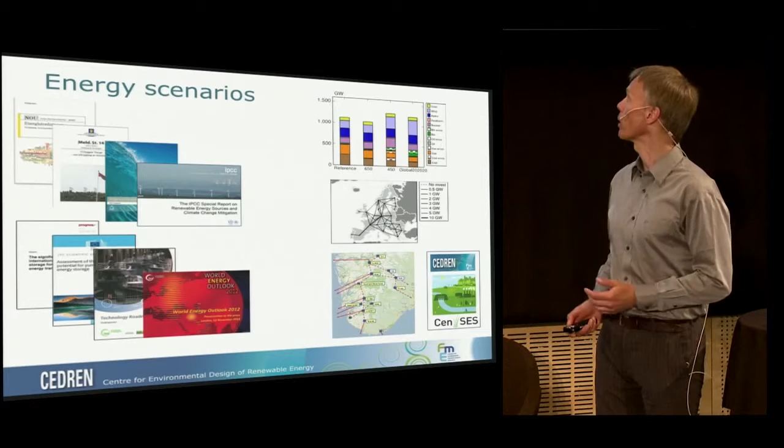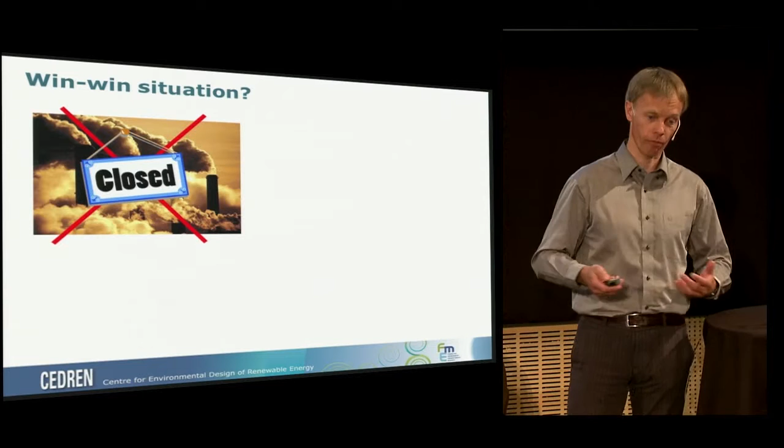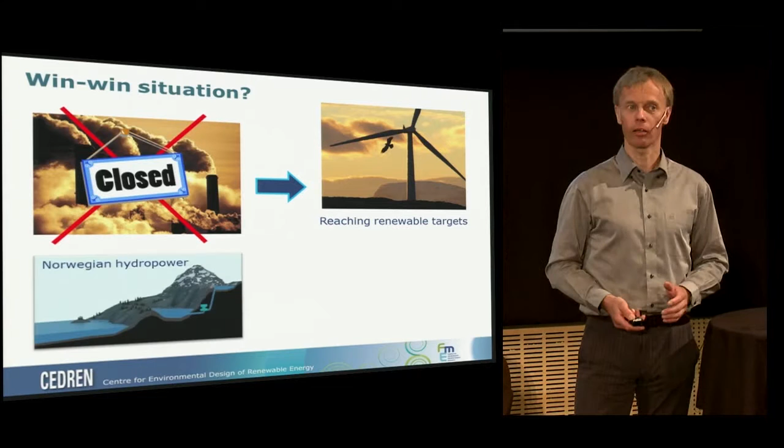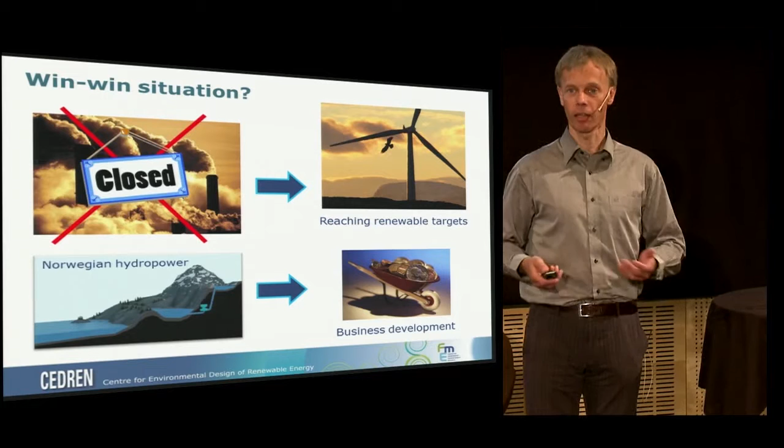First of all, the background for this is, of course, we are looking for some kind of a win-win situation. We have all these fossil fuels, which sooner or later have to be closed down for giving us power, and we have to have a transition to renewables. We all know this, and it will happen in time. My question is, how can Norwegian hydropower contribute to this? At the same time, as we heard today as well, we need to have growth, economic development, and business development. So this needs to be done.

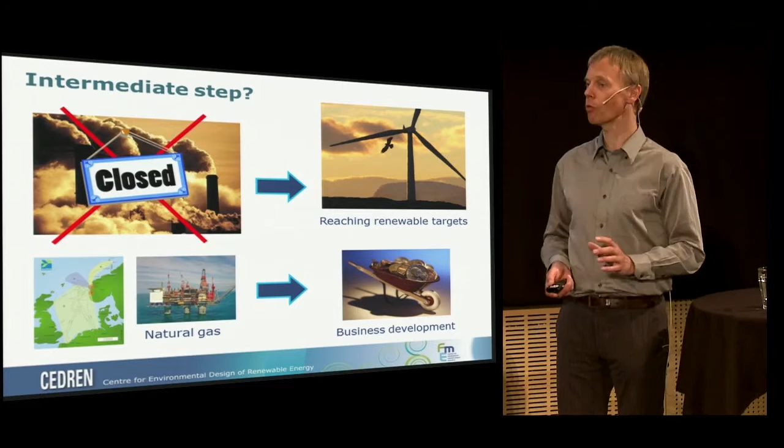As you have just heard, we have reached 400 ppm of CO2 in the atmosphere. And everybody agrees that we need to do something to get rid of our oil dependence, of our dependence on fossil fuels, and turn to alternative energy. But how to do that? To build that bridge, we hope that knowledge can be a part of that. And that's what we are in the research business to help out. And that's what you, as the future of this planet, will have to deal with. You will have to help build that bridge.

Going back to these energy scenarios again, they have one thing in common. They all point out that there will be a large portion of renewables, and to facilitate the use of them, to give everybody access to clean energy, we need to have better infrastructure, more storage, we have to manage this, and we have to be better at forecasting what's going to happen, because many of these renewables will be related to the weather.

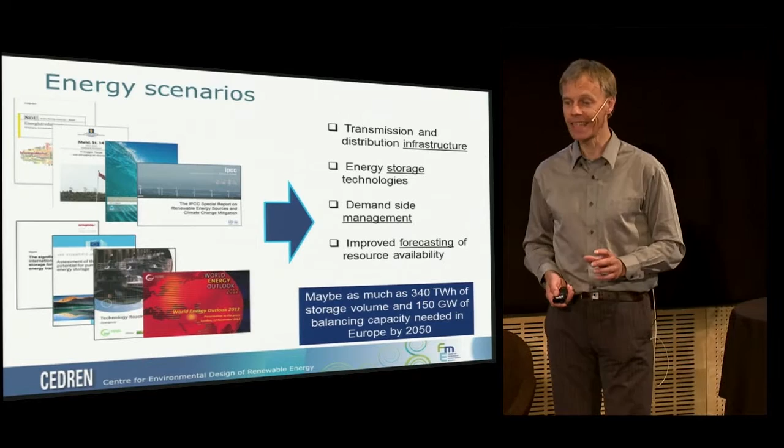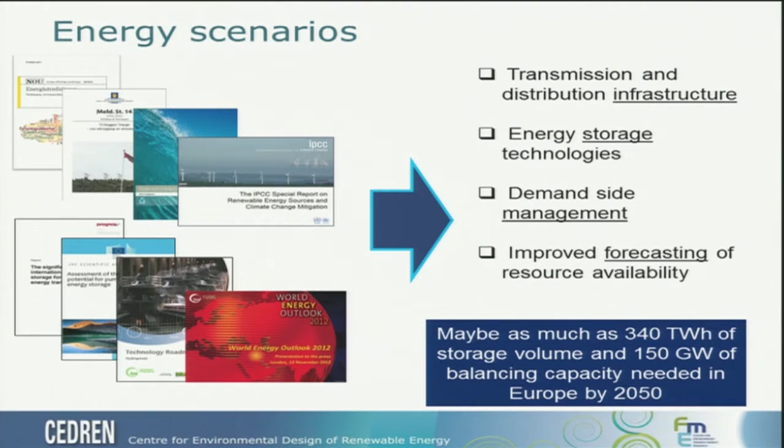Talking about storage, which I will focus on now, there have been studies suggesting that we will have a need only in Europe for maybe almost 3 times as much energy available for storage as we need in Norway alone today. And this is only for storage and balancing with these renewables that are coming in with a large capacity. Never mind the figures, they are probably not correct, but there have been guesses about the future that suggest such figures. Large amounts of storage and balancing are needed in the future.

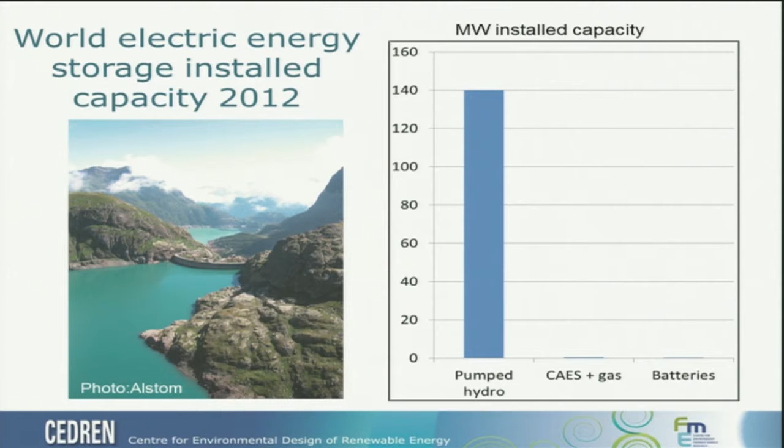How do we store electricity today? Well, we store it as pumped hydro, like the picture here shows you, from a place in Switzerland, reservoirs of water. This is the ideal storage of energy. If you raise that to a head, you will have energy stored. Other technologies are not really providing anything. There are batteries, compressed air, and so on, but compared to pumped hydro, they are not contributing.

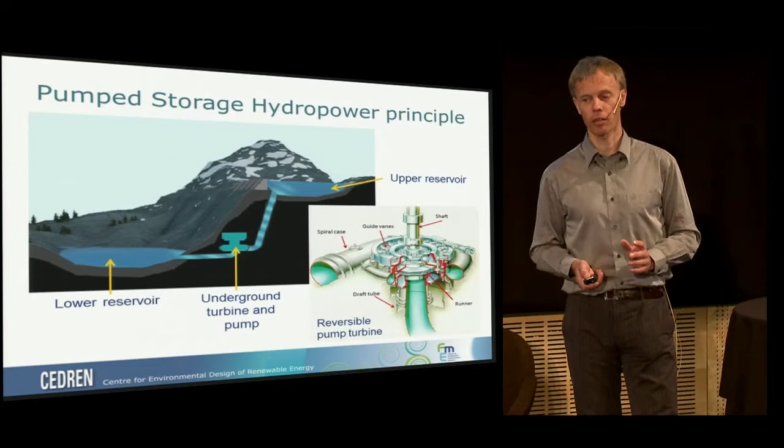To give you an idea, if you don't know how pumped hydro works, you can imagine 2 reservoirs of water, an upper reservoir and a lower reservoir, connected through a tunnel and with an underground pump and turbine, which looks something like this. This is how pumped storage is contributing today to balance the difference between demand and production of energy.

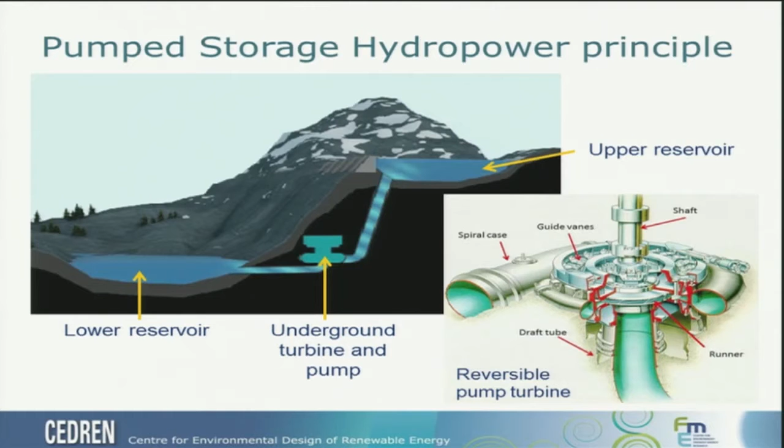Today, I said briefly 140 gigawatts, while Norway's total hydropower installation for normal hydropower today is 30 gigawatts. So 140 is not really a big number compared to what little Norway is already producing. And Europe has about 45. Compared to the big figure I showed you recently, this is not enormous.

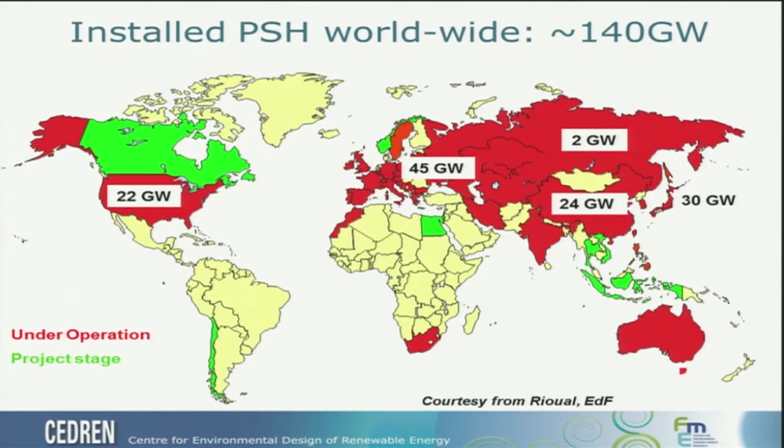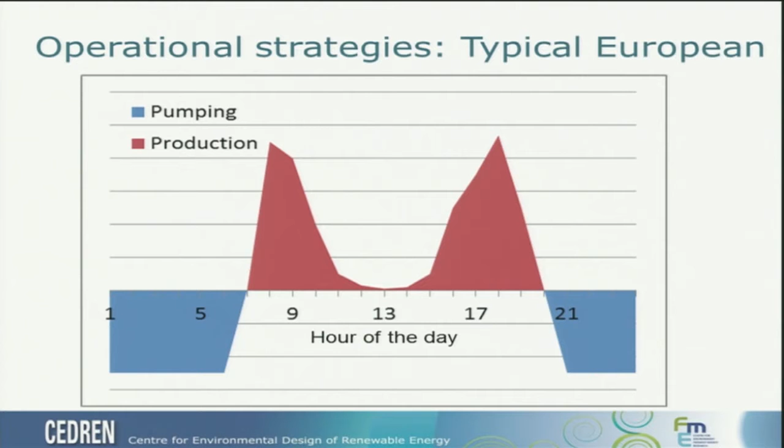The way it's used normally is like this. During nighttime, water is pumped to the upper reservoir, and during daytime you will produce and run it through the turbines to the lower reservoir. This picture is taken from Germany. You can ask why does it have such a peak in the morning? Well, basically because everybody turns on the shower and wants their coffee, and the same thing when they get home from work. And in the middle of the day, you might have solar energy providing the services, so you don't need it.

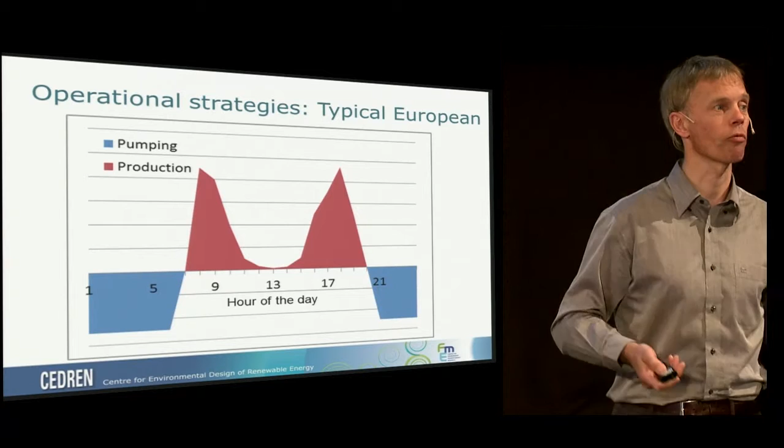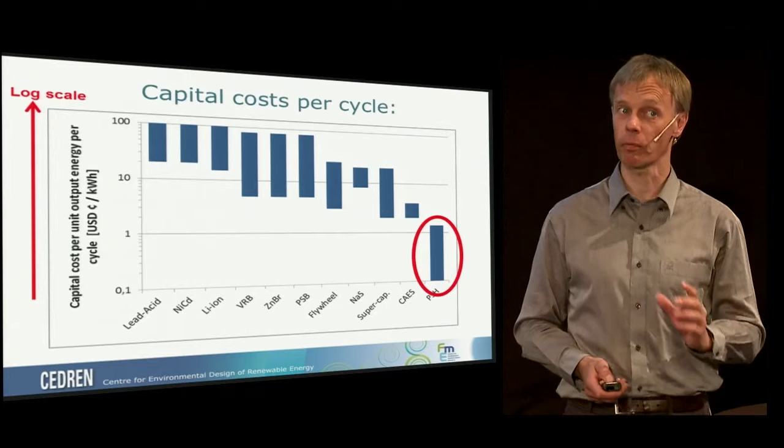Why is pumped storage the only technology used today? The reason is probably found in the cost. Look at this. On the right end, you have pumped storage hydropower. Look also, this is a logarithmic scale, meaning the cost range of pumped hydro compared to all other technologies that exist today. Of course, many of them will get lower cost as research goes on, but hydropower is an order of magnitude cheaper in the way of storing the energy.

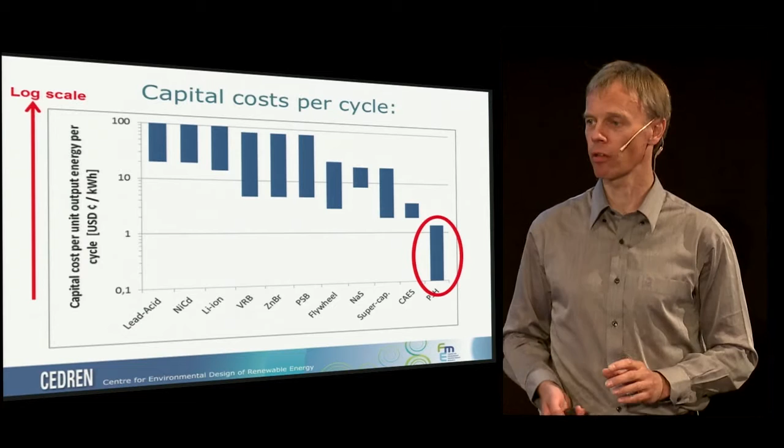There are, of course, many other considerations that must come into place if you want to store your electricity somewhere, but this is one important one: up to today, this has been by far the most efficient and by far the cheapest. So let's have a look at what they look like.

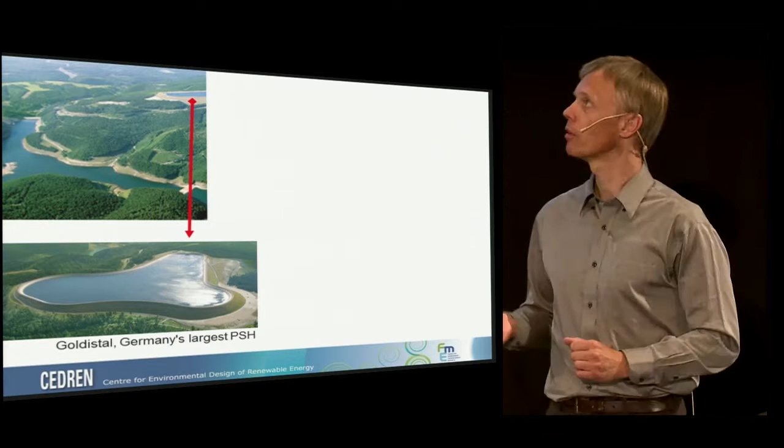Well, this is a picture of Germany's largest pumped storage hydropower station. You see on the upper picture, this is actually a totally artificial lake built on top of a hill to interact with this lower reservoir, and water is put back and forth here.

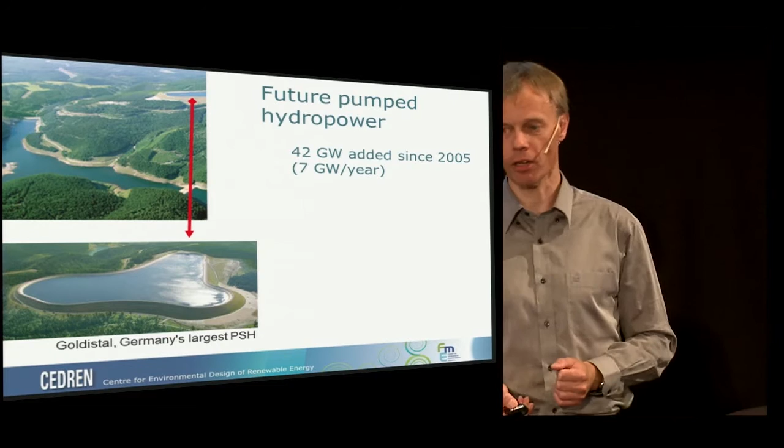There has actually been a lot of pumped storage hydropower added in the last years, and for the future there are huge numbers projected. I'm not sure if they will be 500 to 700 gigawatts worldwide. Remember, today we have 140. In 2050, this is what the IEA suggests, but at least there will be a large need and large numbers of this kind of technology.

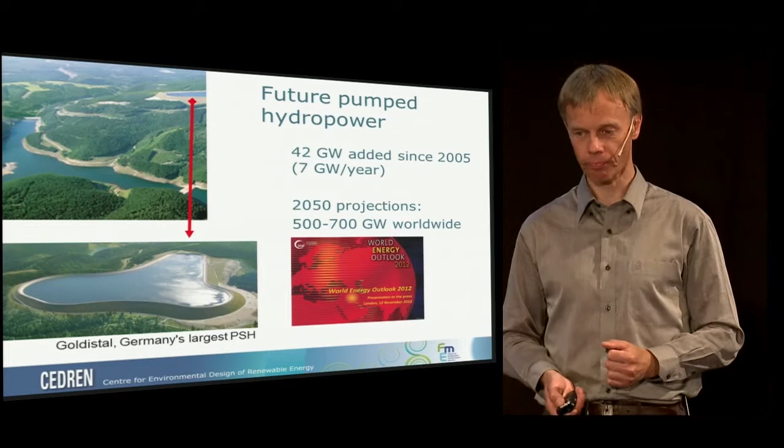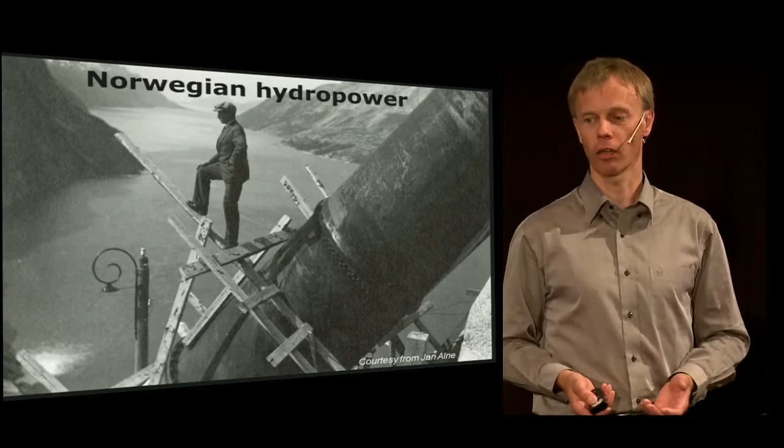Okay, let's have a look at how Norway is doing our hydropower. Norwegian hydropower is the backbone of our welfare. Norway would never have developed such industries and such welfare if we didn't start exploiting hydropower more than 100 years ago on a big industrial scale. Of course, we're not doing it like this anymore. I'm quite sure the health, safety, and environment directors of this power company would not have approved that kind of attitude. But still, this is the backbone of our welfare.

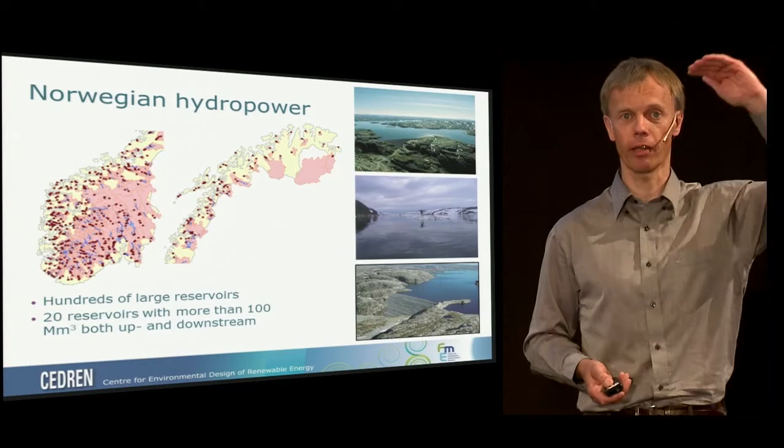And Norwegian hydropower is not at all like hydropower in the rest of Europe. We have hundreds of large reservoirs, and they are mainly made from natural lakes, which we put a dam on to have regulation, right? Of course, there are also some artificial dams, like the one I showed you from Germany, but most are not. And there are even many pairs of reservoirs. Some are in the high mountains, some at intermediate heights, and some at sea level.

One of them, the biggest reservoir we have today, can store almost 8 terawatt hours of energy, which is 5% or more of Norway's need. And it would take 3 years to fill this up if it was empty.

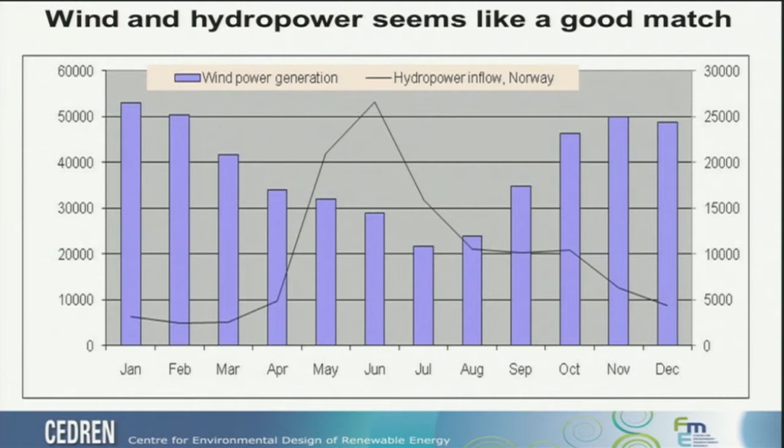Because of snow and cold conditions, the inflow to hydro reservoirs is highest at this time of the year, actually. If you were here in Norway a week ago or a little bit more, there was quite heavy flooding in some places because of heavy snow melt. So it looks like a perfect match on this scale.

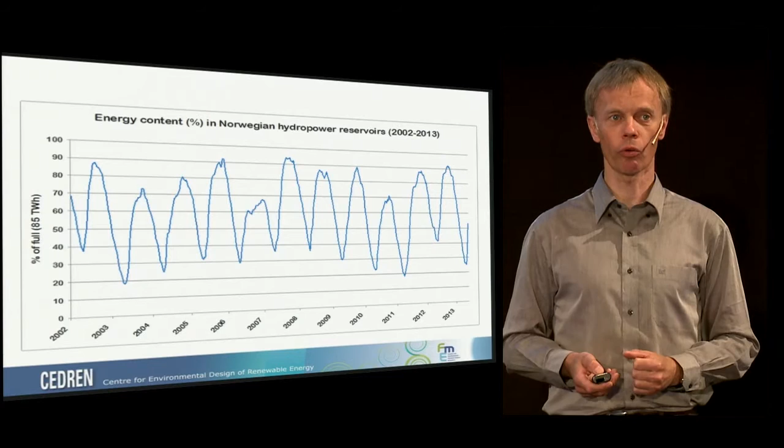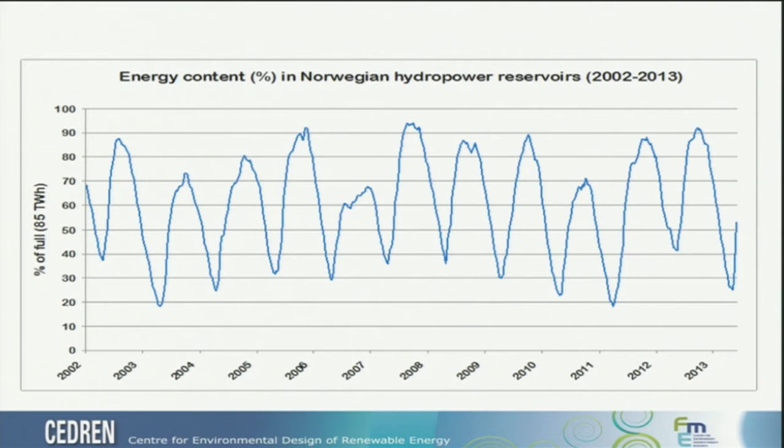And if you look at all the Norwegian reservoirs, this is 10 years of storage level. They are almost never totally full, and they're never totally empty. It cycles throughout the year, of course. So there is storage capacity available.

Let's have a little look at how it works in Norway. We're not doing any pumped hydro in Norway like they do in Europe, but we need indirect storage. If you follow this figure, it's from a week in October. The blue line is power generated in Norway, and the red line is the actual demand. So in the middle of the day, we generate more, and we export it to Denmark, Sweden, and the Netherlands, where we have interconnectors today.

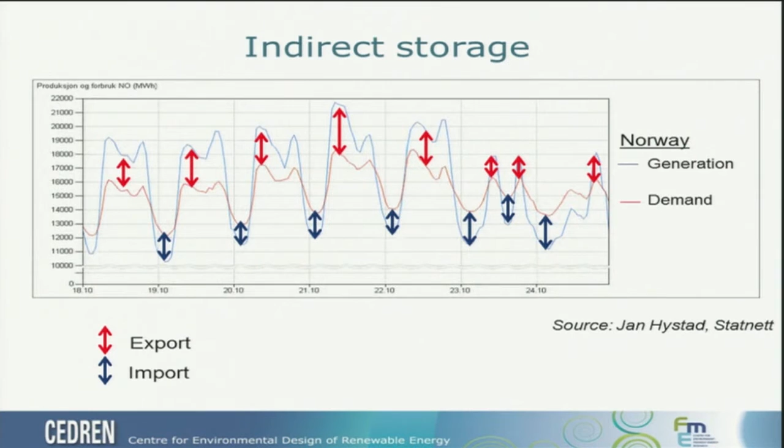And at nighttime, actually, when the demand is lower, we produce less, because hydropower we can turn on and off more or less as we wish. Of course, there are some restrictions, especially in those plants that have an outlet directly into rivers. But this is how we do it today.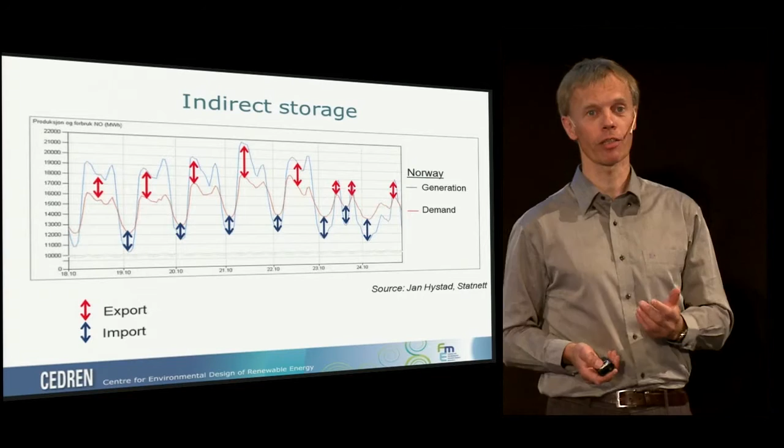We don't actually need to pump the water back, because nature takes care of that. When it rains, it brings the water from sea level to the mountains. So that's okay. That's how we do it in Norway today.

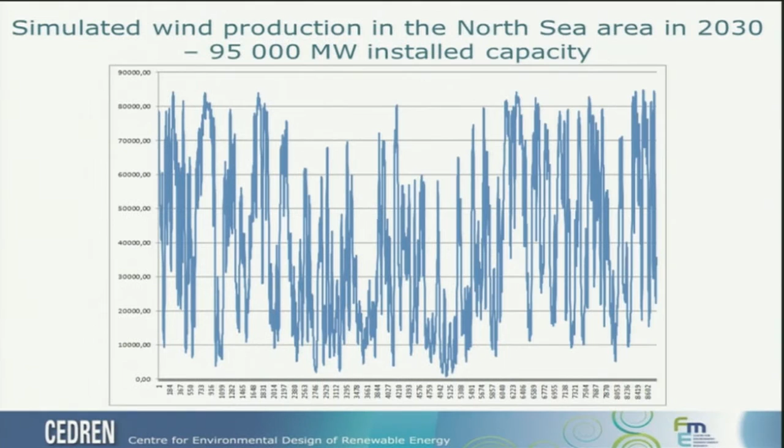Have a look at future wind power production. This looks pretty messy. It's 1 year, sorry, let's zoom in. This is some months of wind power generated in the North Sea area in 2030, if all the installations that are planned are put in place, using the wind that blew in September 2001. And you see the large variations.

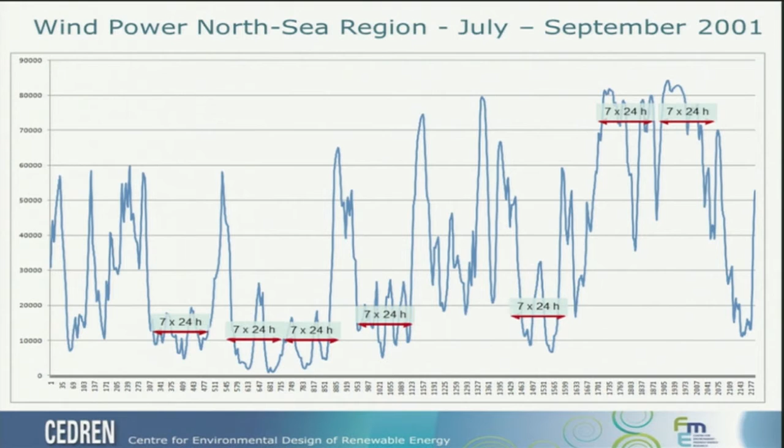Even a closer look will show that it could go down from 30,000 megawatts above the average to 30,000 megawatts below the average in less than 1 day. And then it could stay low for 1 week or 2 weeks. This is where European hydropower cannot contribute, because it would take at least 1,000 of those power plants I showed you from Germany to support that energy when there's no wind.

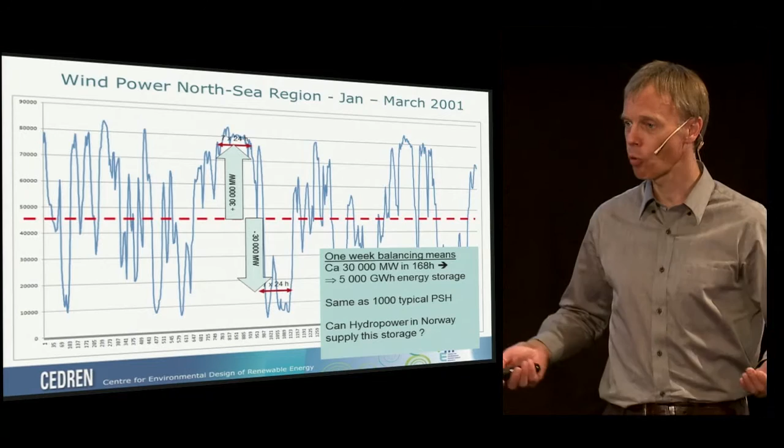Contrary to what our minister told us this morning, where he said that this green battery of Norway could have consequences in rivers, this will not at all affect rivers, because it will be in the same reservoirs as we are using today, so no outlet to rivers. And it's possible to install 20,000 megawatts of new capacity.

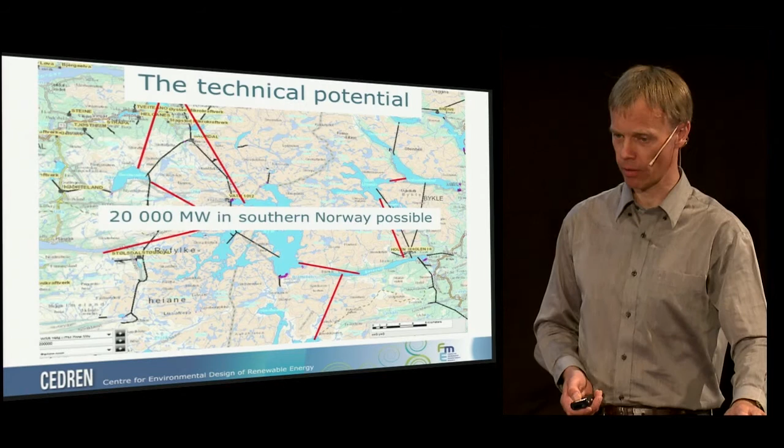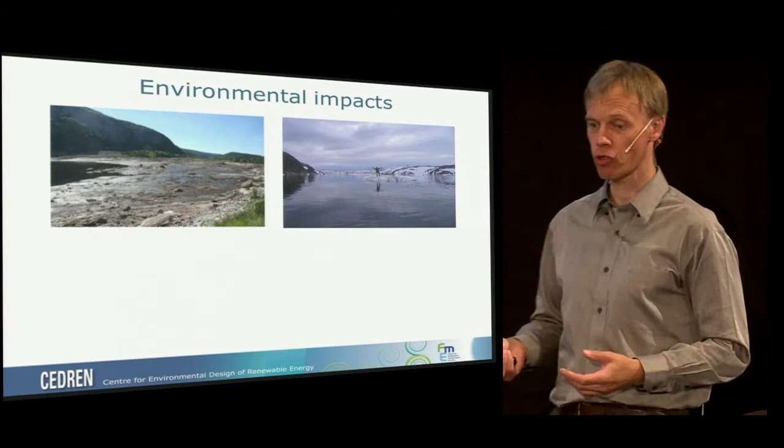Of course, there will be environmental impacts, as there are today from hydropower, especially in the reservoirs. You have drawdown zones, and these reservoirs are filled up. There are two pictures showing the different seasons, and this has to be carefully investigated.

There will be a need for new power lines, and they will have some consequences on nature. But they will not necessarily lead to negative consequences, because this is happening in reservoirs where we already have established hydropower. So the fluctuations will be different, but it will still happen within the limits of today's regulations.

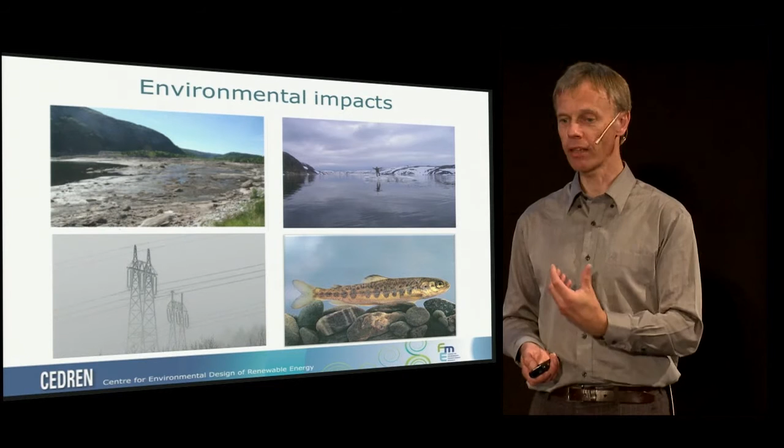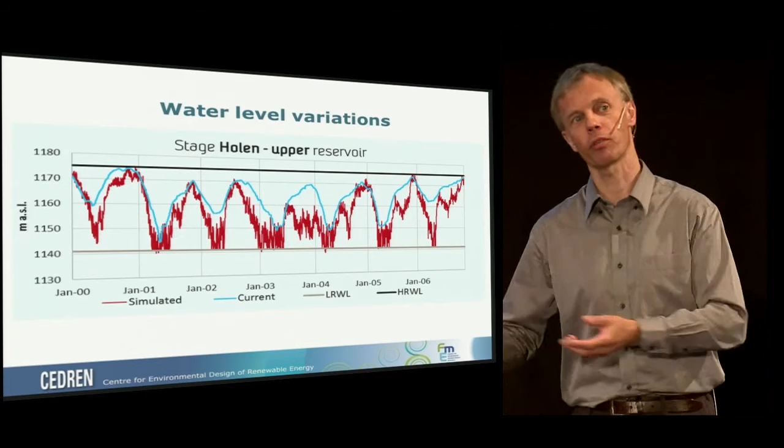And the same in the upper reservoir. Here you see the red line, which could be the future. The reservoir level is more often filled up than it is today. So those people that have a cabin next to this would have found it drawn down in 2004. With a new situation, it will be full of water. But of course, this has an impact which has to be studied.

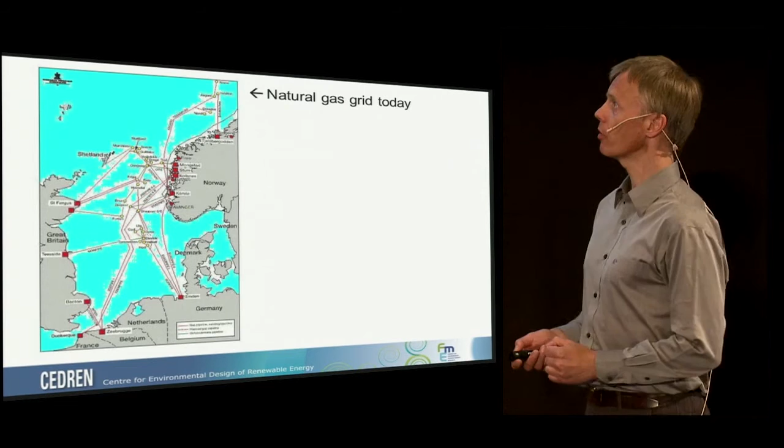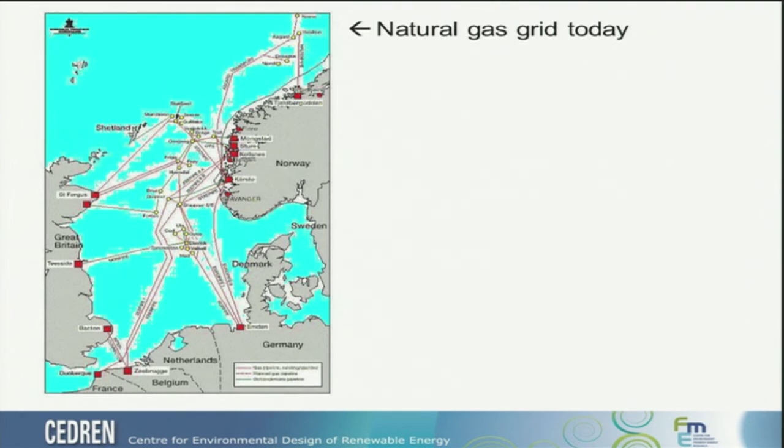This picture you haven't seen, but you heard a lot about it. It's how our natural gas is distributed to the UK and continental Europe today. My question is, wouldn't it be an idea also to establish a similar electricity grid for exchange? We're not the only ones proposing this, but if we do that, we could connect the wind resources around this blue area with hydropower in Norway to back up the rest of Europe.

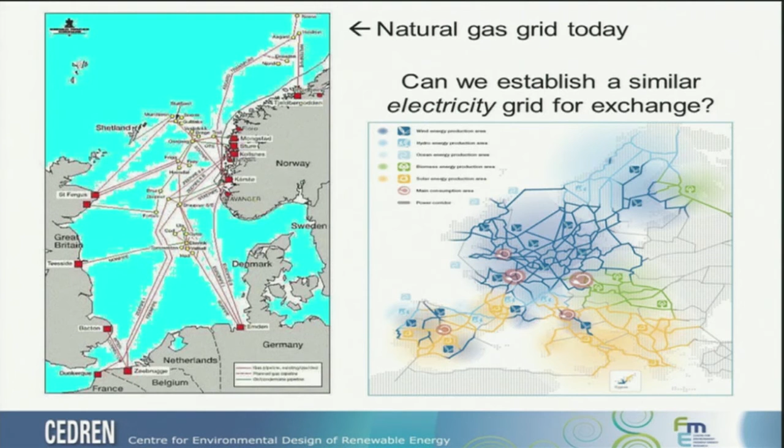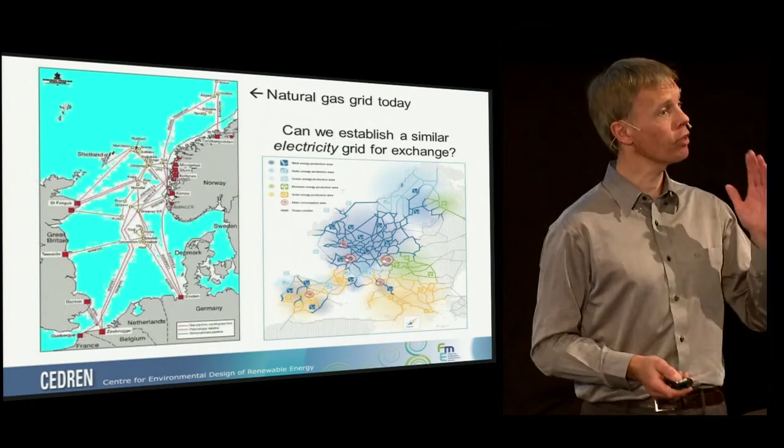And this could be done without large environmental impacts. In some places, some positive effects, and in other places, some negative effects. They are quite small in both ways, but it's a myth that this will have large consequences for Norwegian hydropower. And we can do this in parallel to the existing hydropower system, so our security of supply will run as today, or even be more secure because we have more interconnections.

So, to finalize, a better future would of course have been to develop a wireless technology, so we don't need all these transmission lines. But I think it will be difficult. Maybe future technology will bring that. But what is for sure is that there are many scenarios about the uncertain future. There might come rapid changes. We have seen that not long ago in the energy business, when the Fukushima accident led to different policies.

What is quite sure is that those hydropower reservoirs that were built, some of them more than 100 years ago, will still be there when all of us are retired, and there will still be hydropower turbines running, and they will still have an excellent storage of potential energy in the water. They are available, and they can be used in addition to how they are used now, because we are not using them totally. But because hydropower requires large investments, we need business models and governmental agreements. If not, I don't think it will happen only by the market as it is today.

So my final word is that we have a large opportunity, and I would strongly suggest that we investigate this. Thank you for your attention.